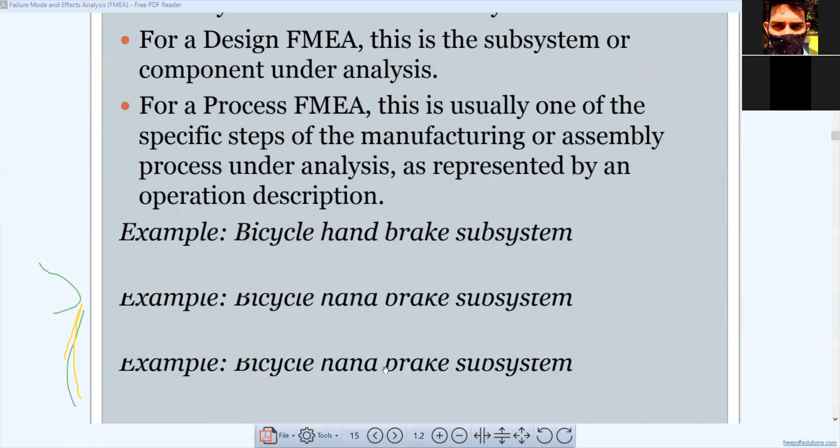Example, bicycle handbrake subsystem. సో ఇక్కడ ఇది మీరు చూస్తే క్లియర్ గా మీకు తెలుస్తుంది. He has given one analysis. సో ఇది క్లియర్ ఎగ్జాంపుల్, ఆల్ టెరైన్ సిస్టమ్ హైరార్కీ.

OK, all terrain bicycle system. ఆల్ టెరైన్ బైసికల్స్ అంటే కొండలు ఎక్కుతాయి కదా. The bicycles which are used on hilly surfaces or terrain based surfaces are called terrain bicycles. So he has taken an example of bicycle system. Frame, the bicycle frame comes under subsystem, front wheel comes under subsystem, rear wheel comes under subsystem.

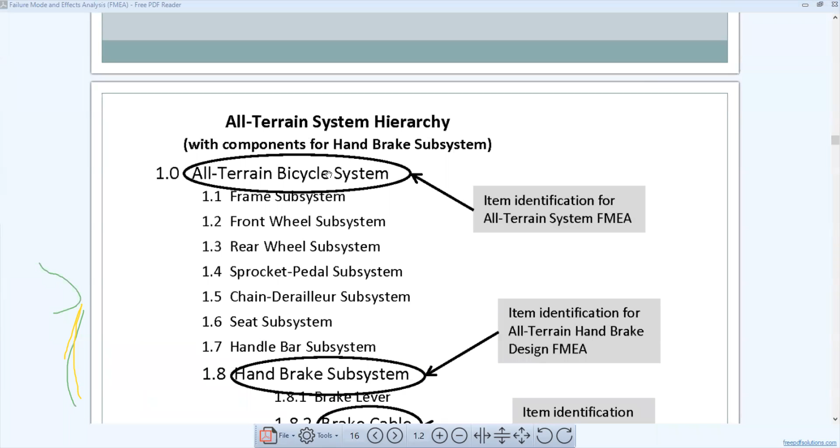I want everyone to relate this to your workplace components or workplace systems. What will be the workplace system? Machinery, conveyor, cranes, vehicle, even car, bike, anything comes under subsystems. So did you clearly understand? He has taken bicycle as a system, all terrain bicycles as system, and subsystem he has taken all the components.

So here in 1.8 he is talking about item identification for all terrain handbrake design FMEA. If it is handbrake, if it is subsystem, it will fall under design FMEA. Design is a part of design, right? Brake cable is also a part of design, right or not? Brake cable is also a part of design. So he took it as design FMEA.

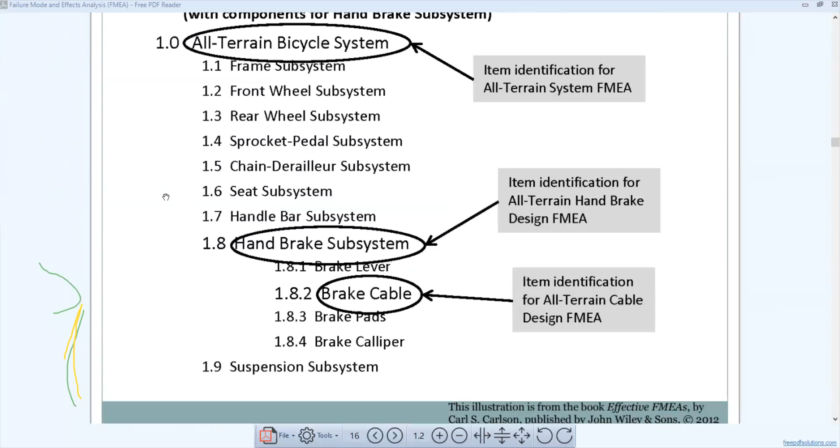So, function. What do you mean by function? What we have discussed, item we have taken this cycle as a system. What is the function of the brake? Function is what the item or process is intended to do. What is the function? To stop the cycle. Yes, to stop. That is what the brake is intended to do.

How will the cycle be stopped? By having good friction. If it is having the brake, if it is having good friction between the brake and the rubber of the brake and the cycle rim, only then due to the friction it will stop.

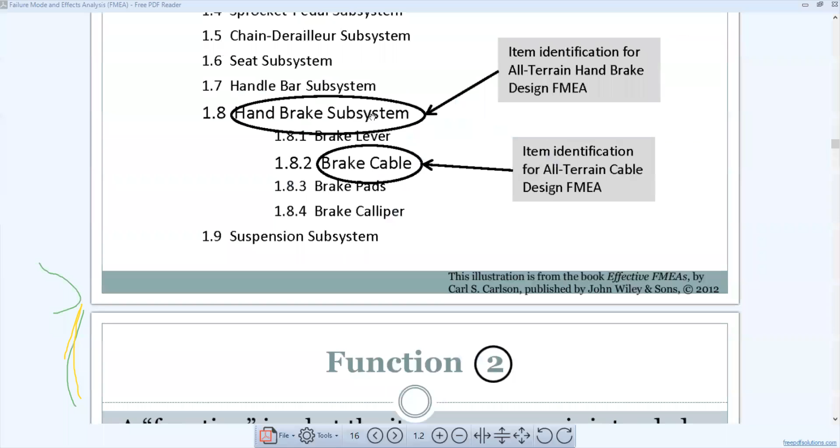So function, coming to the function only, we'll have what it's saying. Function is the item or process intended to do, usually given a standard performance requirement. For design FMEA, it is a primary purpose, the design intent of the item. What is for design FMEA, what he's saying? He's saying he's concentrating on the intent of the action. What do you mean by intent of the action? The actual purpose of that design.

For process FMEA, this is the primary purpose of manufacturing, assembly, operations. If it is design FMEA, it's a design intent of the item. If there is a process FMEA, when is process FMEA applicable? When the manufacturing or assembly operation is going on. Okay, just hold on for a second.

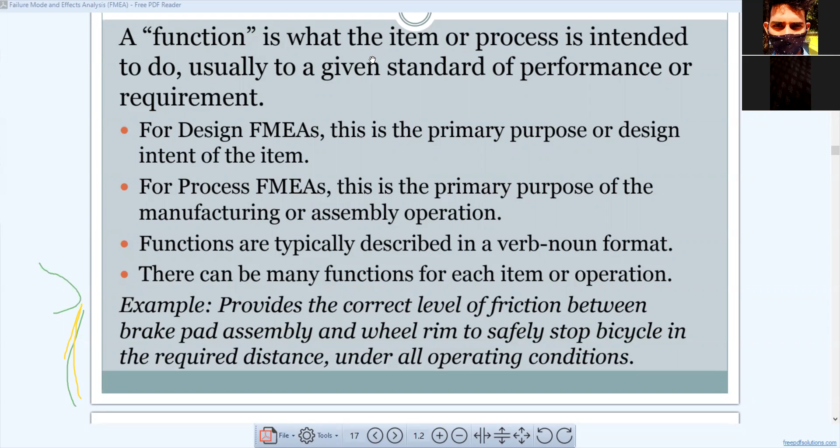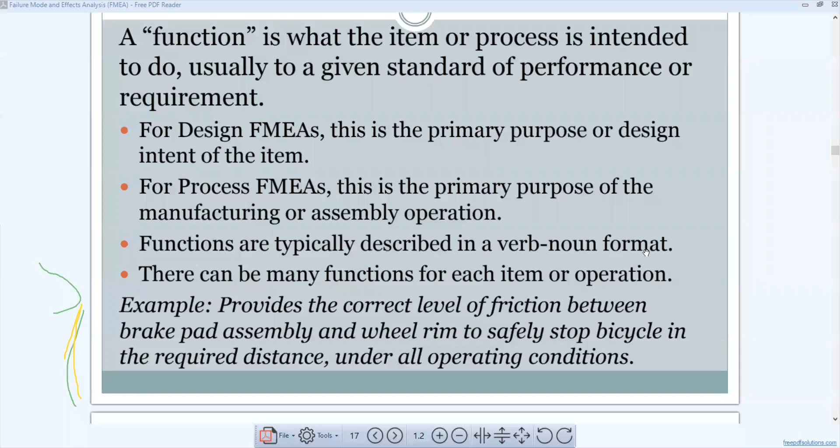So what do you do? What did you study? Provide the correct level of friction between brake pad assembly and wheel rim to safely stop bicycle in the required distance under all operating conditions. What do you mean by all operating conditions? Whether it can be raining, whether it can be summer, terrain, it can be anything. What is the function of that brake?

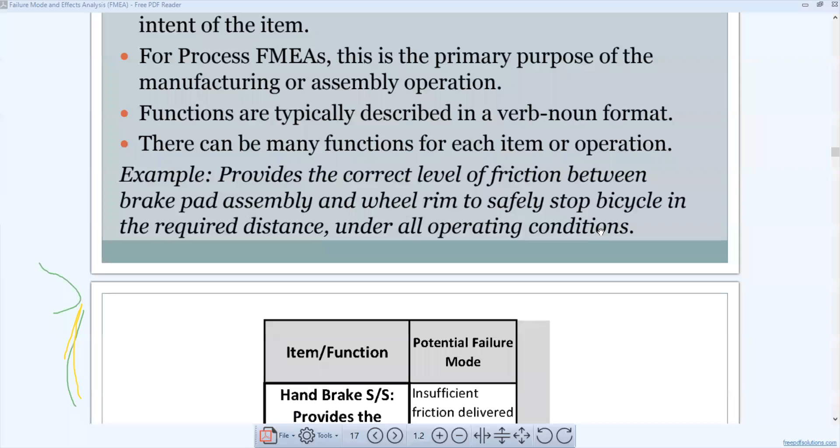It should stop the bicycle in a required distance. Sometimes what happens, if we apply the brakes at one point, it will get applied in other distance. That's not fair, that is not considered. So this is the example of item function.

Okay, potential failure mode. See, don't get confused, we are in near item and we are discussing about function. So after function, what we have? Potential failure mode. So see, this is the function. What is the function? Provides the correct level of friction between brake assembly and wheel rim to safely stop bicycle in required distance under all operating conditions, which is what we discussed.

So what is the potential failure mode? Insufficient friction - see, you clearly understand the potential failure mode. This is not completely failed. This is a potential failure. This has a potential to fail.

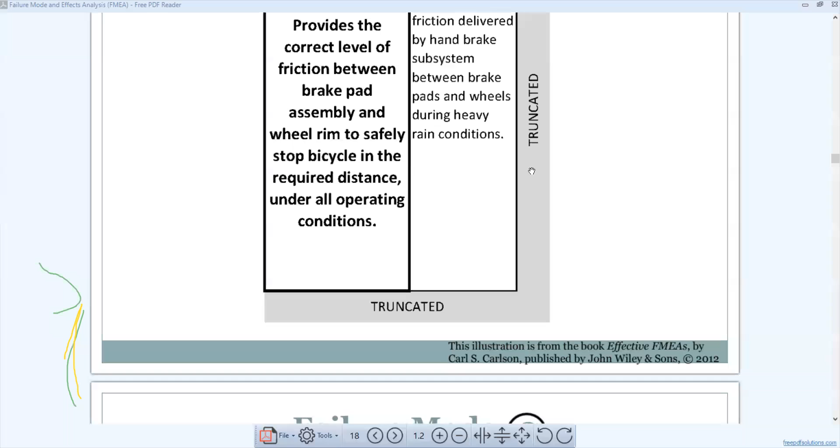Okay, fine. See, it is written truncated here. Don't bother about it. Truncated means partial information is given, is what he's saying. Don't bother about this, fine.

Potential failure mode: insufficient friction delivered by handbrake subsystem. Insufficient friction between brake pads and wheels during heavy rain conditions. This can be a potential failure mode. So why is this potential failure mode considered?

Why? Because we are doing FMEA, failure mode - this is the main core concept. This is the cause: insufficient friction delivered by handbrake. This is a failure mode. In what way may this failure mode help us improve the design? This is what the core concept is.

So this is not yet failed, but if it is neglected or if it is not controlled, it will become a complete failure. Okay, so failure mode.

See, here he's saying what is the clear abbreviation of failure mode. So failure and mode are two different words. He is referring to the dictionary. Failure is an act of ceasing of function or a state of non-functioning. Mode is defined as a way in which something occurs.

See, to clearly explain you - due to non-functioning of a system, something may occur, something may happen. That is what failure mode is.

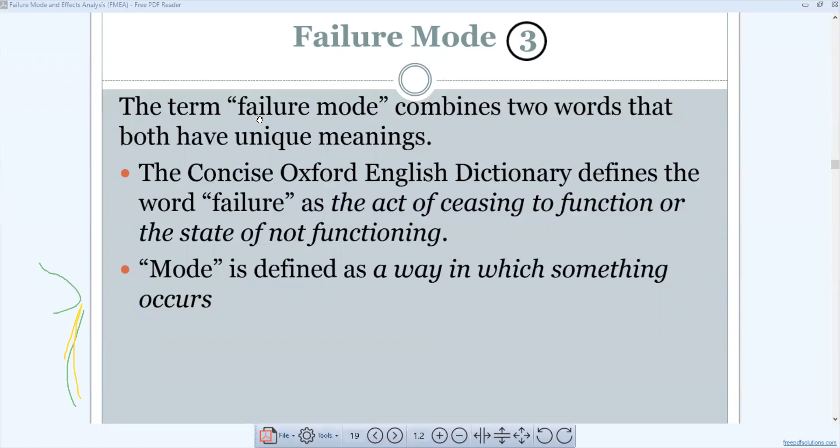I'm very sorry. Failure mode means if something, due to the non-functioning of a particular function, something may occur. It can be anything. If it is our failure mode due to non-functionality of the brake, something may occur.

So what can occur? What is the potential failure? If something can occur, we'll look into it. Failure mode is the manner in which the item or operation potentially fails to meet or deliver the intended function and associated requirements. That's the simple thing we have discussed till now. Okay, it fails to deliver.

What does the brake actually do? For example, if a crane is lifting a 1-ton bag, what is the function of the crane? What does it do? It should lift, and it should lift from one place to another without falling off weight or without any toppling. That is the main function, right?

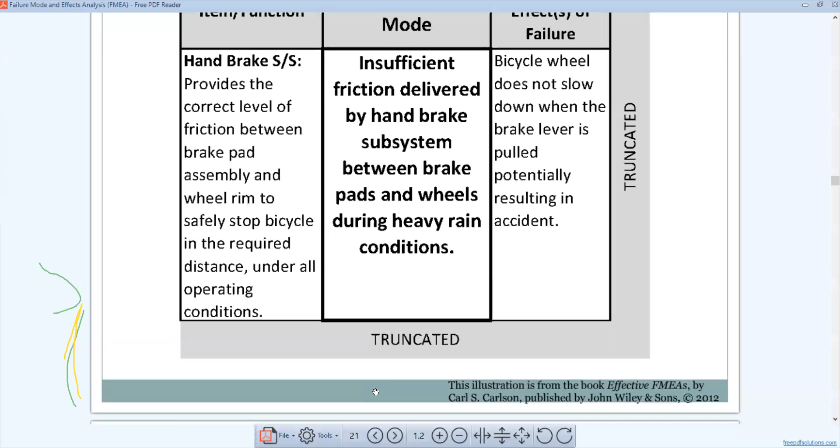You can write an effect related to the brake pad and also the rim of the bicycle, in that way. Fine. So effect - the effect is a consequence of failure on the system and the end user. So what is the effect here? We are here now.

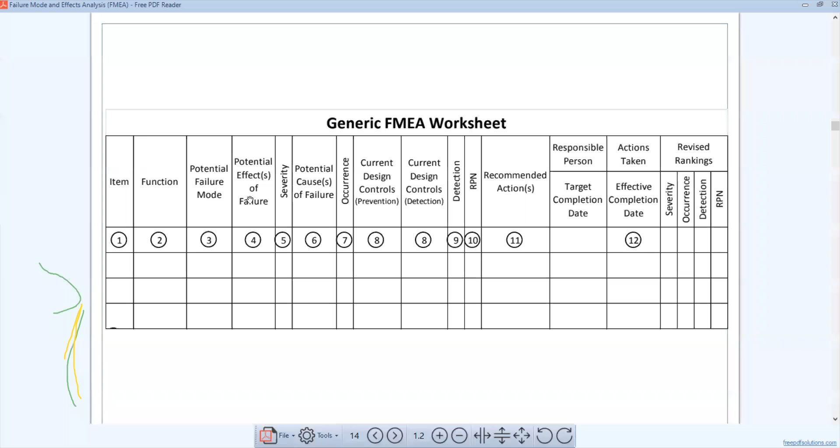So he is saying, what is the effect? Effect means consequence of failure. He's saying consequence of failure on the system or end user.

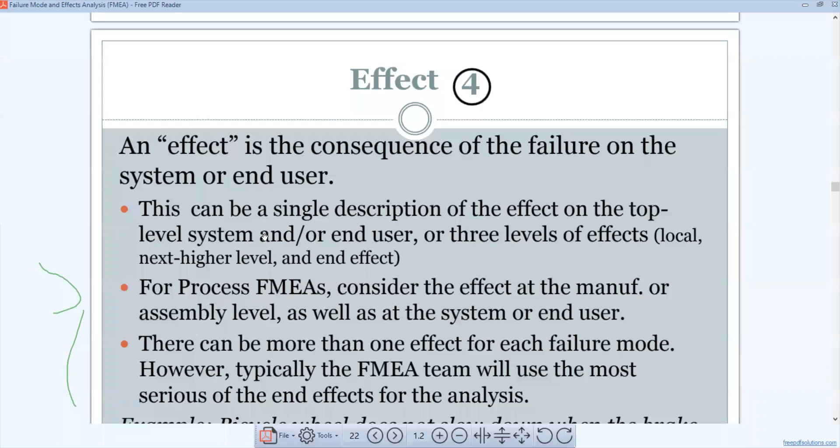That also has to be taken into consideration when it comes to process, when we do failure mode and effect analysis on the process level. So how can we relate this second point to our example?

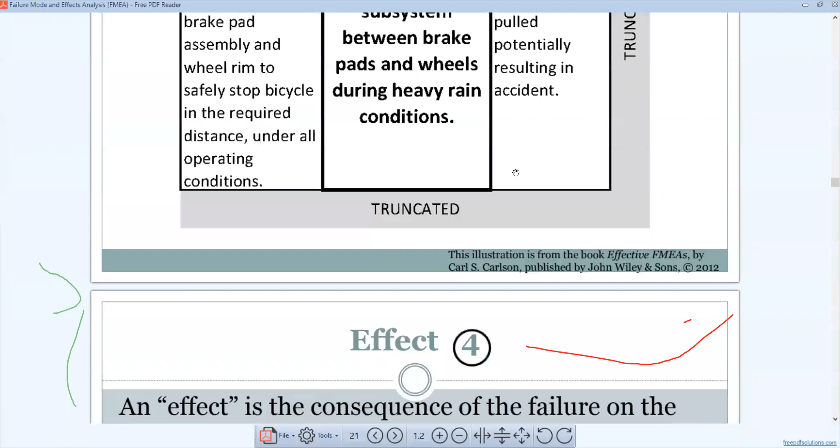We can relate it like this: the brake has no friction, meaning at the manufacturing level, the quality check is not being done in a proper way. So at the assembly level, when the lever is pulled, the bike wheel does not slow down when the brake lever is pulled.

How can you relate this? You can relate it by saying the assembly of a brake is not proper. The manufacturer, after manufacturing, it can be a manufacturing defect or an assembly level defect. That is process FMEA. There can be more than one effect for each failure mode.

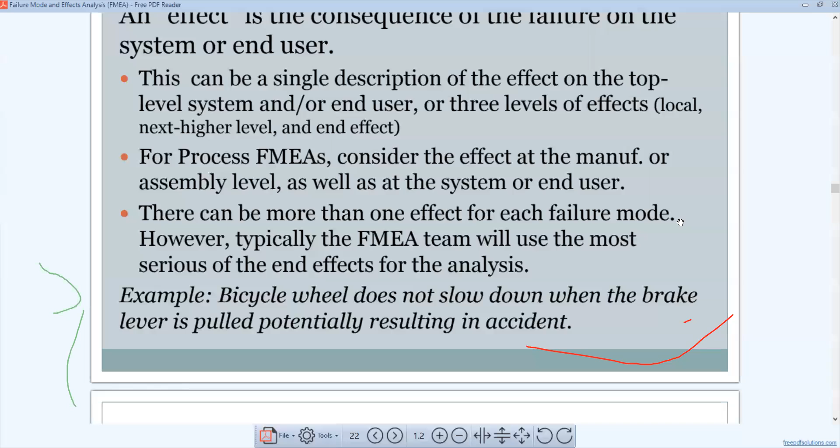Each failure mode means for failure of anything there can be one or more effects. See the example he has given: bike wheel does not slow down when the brake lever is pulled. We have already discussed this.

So here he is talking about severity 10. Why has he given severity 10? Normally severity rating or ranking is based on particular numbers. If it is a scale, actually he's taking 10 here. Normally people take 1 to 5, or it depends.

If it is 1 to 10, he says: one is no effect, loss of something is like a severity. If it is 10, it is severe, highly severe. So what can happen if severity is 10? Why is severity 10 given? Because there is a loss of life, because there is a fatality. That's the reason he has given severity 10.

We have discussed this, we have come to severity. Severity is a ranking number associated with the most serious effect for a given failure mode.

So the most serious effect. See what can happen when the wheel goes down. The wheel, we don't know, what are the different effects?

The wheel going out of control is an effect. The wheel not getting proper grip is an effect. This is potentially resulting in an accident. Before it results in an accident, what is the effect? All these can happen.

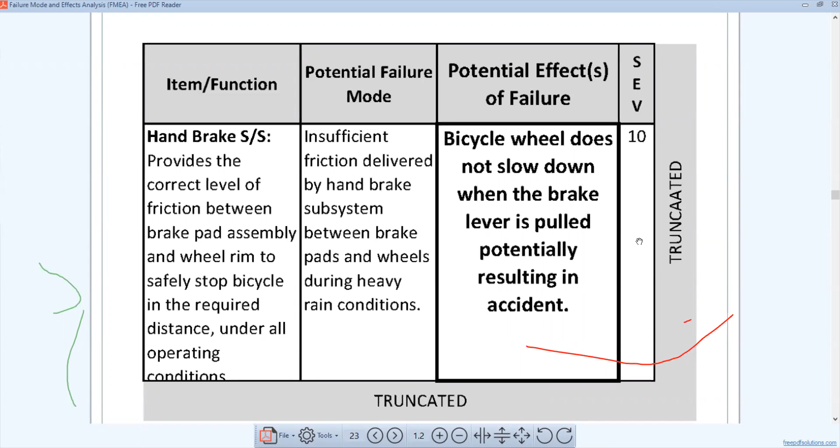So that is how we'll take a severity ranking, based on the criteria from a severity scale, a relative ranking within the scope of a specific FMEA.

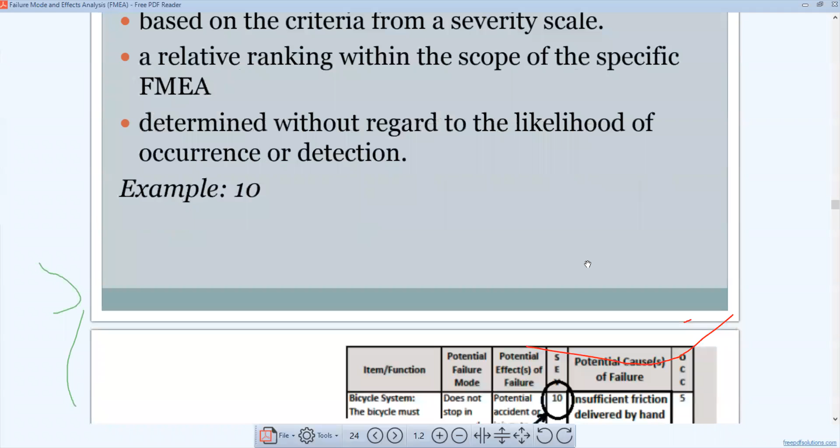See what you can see here: what is rank 10 potential failure mode? I'm reading here: failure to meet safety and/or regulatory requirements. This is an effect. Criteria: severity of effect on product.

Just remember this. You don't need to draw all the charts in your exam, but you have to draw the chart which I showed you at the beginning, 1 to so-and-so chart. So here we're coming to the severity ranking.

What he's saying: potential failure mode affects safe vehicle operations and involves non-compliance with government regulations, without warning. So if it is severe, that is the reason he has given 10, because in these situations they won't warn you or give prior indication, but the incident can happen.

Failure of safety measures can happen, which can lead to severe accidents. That's the reason he has given that a potential or severity rating of 10.

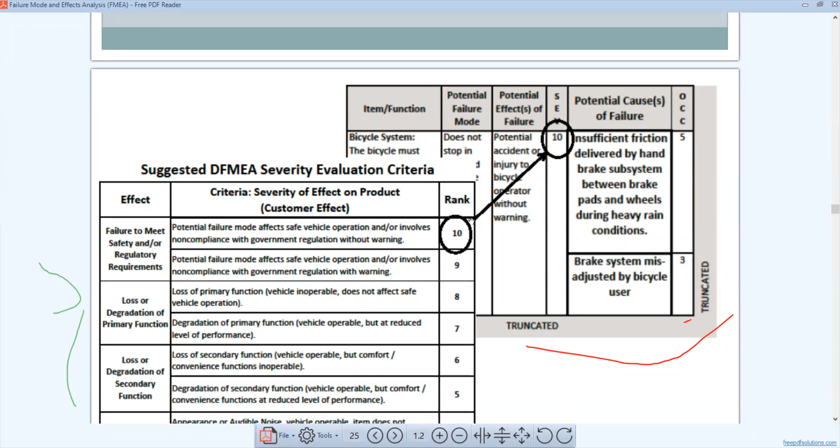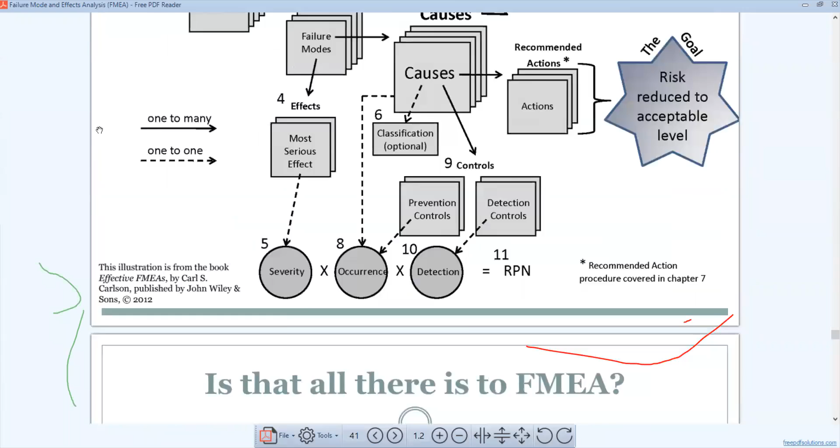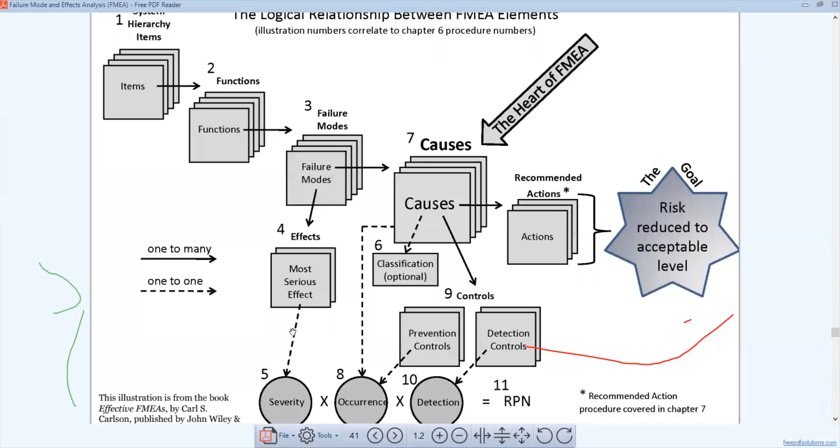Okay, I would like everyone to understand the cause very clearly, because cause is the heart of failure mode and effect analysis. From the cause only, let me show you how it is divided. Here, the cause is the heart. This is why I mentioned this, how the cause is deviated and classification and RPN number is derived. So cause should always be understood.

Cause is a specific reason for the failure, preferably found by asking why until the root cause is determined. So root cause analysis is a combination within FMEA. So root cause analysis is a part of FMEA, yes or no? He's saying you should determine the cause.

5W and 1H series. So here, what he's saying is by asking why the brakes are not functional, why the lever is not getting applied, why the bicycle did not get stopped, why the assembly is done like that, why the cross checking has not been done, why the manufacturing in the unit is done like that - it should lead to the root cause.

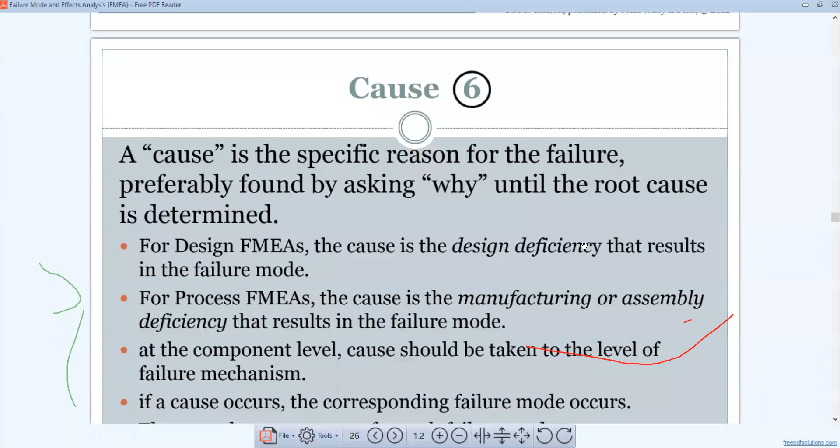If we are talking about design FMEA, there is a deficiency in design and the failure of a design - we are not going into the deeper components. So what do you mean by process FMEA? It is the cause of manufacturing or assembly deficiency that results in failure mode. You have to understand it clearly - simply, design is a subsystem, and process is something else.

Process FMEA is done when manufacturing and assembly is taking place. I have already explained process FMEA. At the component level, cause should be taken to the level of failure mechanism - at the component level meaning subsystems of subsystem, that's a component level.

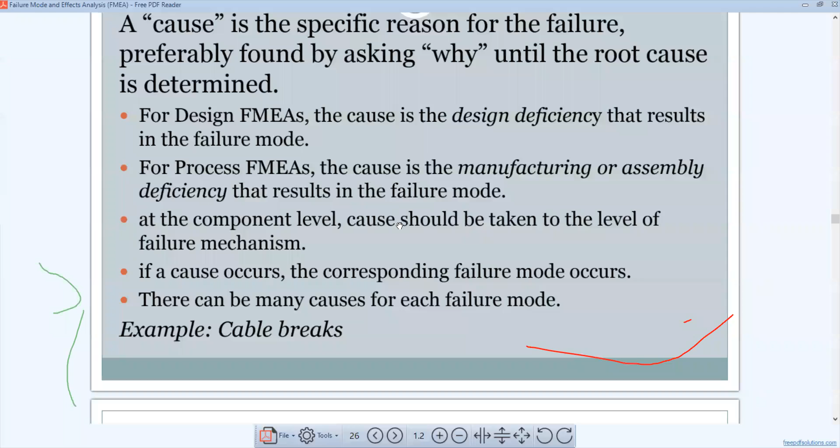If a cause occurs, the corresponding failure mode occurs - there can be many causes for each failure mode. Cable breaks is an example given as a cause. He told it in a vague way, but take it as: what is the cause? Improper functioning of cable breaks at the design level, and improper functioning of the lever at the process level, because it's an assembly deficiency.